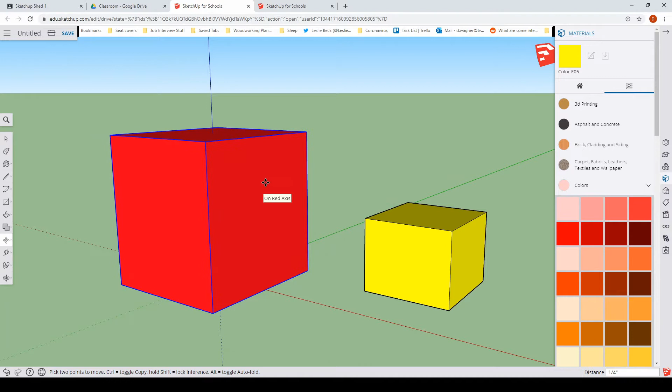You can also move it a specific distance, and we're going to be doing quite a bit of that. So if I make sure that I am on the red axis or the green axis, I let go of my mouse and I don't touch it anymore. And then I enter the distance. You'll see the distance in the bottom right-hand corner. So right now it says that I'm moving at 5 foot 2 1/8 inches. If I enter 120 inches in there, it will move 10 feet, just like that.

That's going to be important, and you have to keep that in mind. I'm just going to undo that and move it back.

You can also grab your components by the snap features to different parts of them. So if I want to move, say, this yellow component, and I get up to that shape and it says corner of component number 2, I can grab it by that corner, and then I can carefully place that corner on the corner of my other component. I could place the corner on the midpoint of that edge in my component, or I could place the corner right there. I can also grab it by the midpoint in the component and sort of put it right there if I wanted it to look like that for some reason.

So for right now, I'm going to grab this component and move it into position where I sort of want it to make my points here in the lesson. We'll have the move tool, and I will grab it by that corner and put it to that corner.

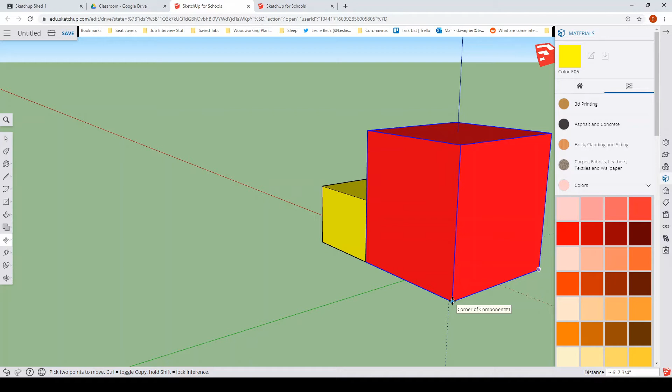Duplicating a component, so copying a component - a lot of different design software has a specific copy command, so that you would hit copy and then you would copy your piece. In SketchUp, you actually do the same thing as the move command, so you click on your box and you start moving it, and then you hit the control key, and that will leave the original one that you went to move. So now I can move this right to the edge of that component, and I would have a shape that looks something like that.

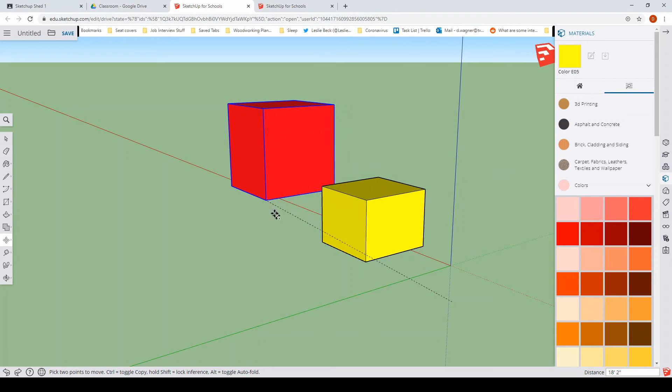One thing, I will undo that. One other thing that you can know about moving is: click on the component, click control, and you move it to that component. Now if you look at the bottom, after I've moved it, if I just type in X4 and hit enter, it will copy it 4 times so that I end up with a total of 5 of them. That's how you make multiple copies in SketchUp. It will copy them, and it will move each one the same distance that you moved the original one, if that makes sense.

Another thing that we want to keep in mind here is editing components. So if I want to say, I want to keep this - let me undo that - and I will just move this, copy it.

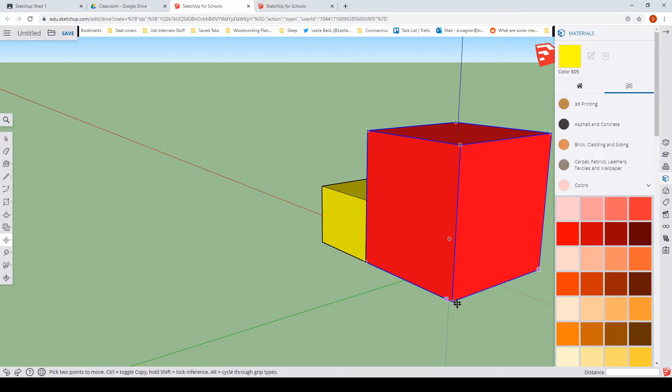So I have a little shape here that's simpler. If I want to change a component, if I've made a mistake or want to modify a component in one place, I can click this and hit edit component, and then that component opens up and I can modify it.

I can push-pull to one side of that, but watch what happens now - everywhere in the drawing, that component will change. That has its advantages, but if I wanted to keep all three parts touching and I modify a component, I'd just have to rearrange those parts after.

I'll hit escape so it doesn't do that. When you want to close the component, you can't actually click on the component and close it - that's kind of a strange thing. You have to click off the component and then hit close component, and now that component is closed and you cannot edit it anymore.

If I decide I only want to change one component - if I drew something and decide I need a different version of that component, or want it to look different than the others in one place in a drawing - what I have to do is click this component and select Make Unique.

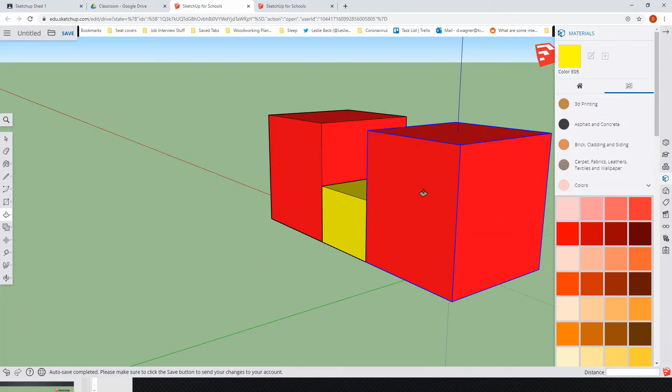Now that component is its own component, not the same as this other one anymore. If I edit it, I can now push-pull it and the other one will not be affected. You can see the other one is not changing size and shape, and this one is.

I have to explain the reasoning behind the dimensions we're doing here. We're trying to build this model shed in SketchUp as though we were building it in the real world, so you'd actually know how it's put together. We have to follow things to scale to keep the realistic nature of this. We've got three pieces here I want to show you.

This red piece represents the component you built last day. This 96-inch yellow piece represents the component you'll be building today. This 96-inch long blue piece is a sheet of plywood. I've just changed the colors so it's easy to follow and see what's going on here.

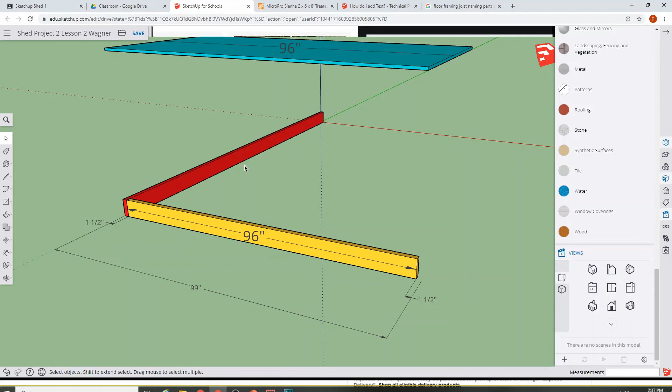So we've already made this red one. We'll be making this yellow one today, and we'll be duplicating those to complete the floor frame. There's a little something you might have a question about - when you buy an 8-foot piece, we're going to end up cutting 3 inches off of them.

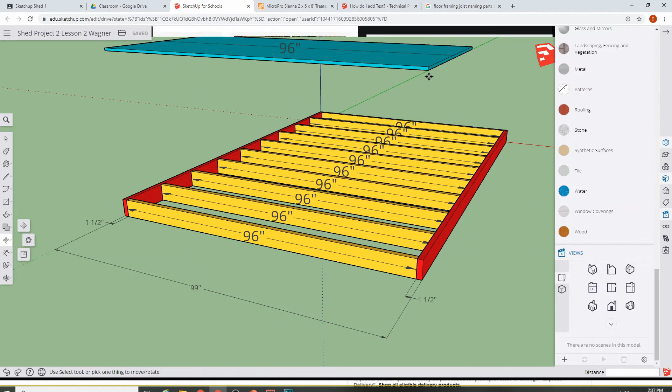This is the reason for that: if you were building this shed in the real world, you'd have to put a plywood floor on it, and your plywood would come in a length of 4 feet by 8 feet, so it would also be 96 inches long. Now, if I take that piece of plywood and move it down onto my shed floor and set it in place, you can see the plywood is 96 inches long.

This joist is 96 inches long, plus you actually have 1.5 inches on this piece here and this piece here. So the frame is wider than the plywood is long, which means these edges of the plywood will have no support, and you won't be able to nail that plywood down to the joist. If I move this plywood back to the right spot and shift it, you can see there's a 1.5 inch gap right here.

So we are going to have to cut these 96-inch pieces down by 3 inches. In the real world, you'd take a saw and cut 3 inches off of every one of those pieces. Since it's SketchUp, we'll have an easier life and just make 93-inch pieces and duplicate them, getting those 96-inch pieces cut down to 93 inches. That will make the overall width of our frame 96 inches, which will match the length of our plywood, and all the edges of the plywood will be supported, with wood underneath all the edges to drive nails and screws into.

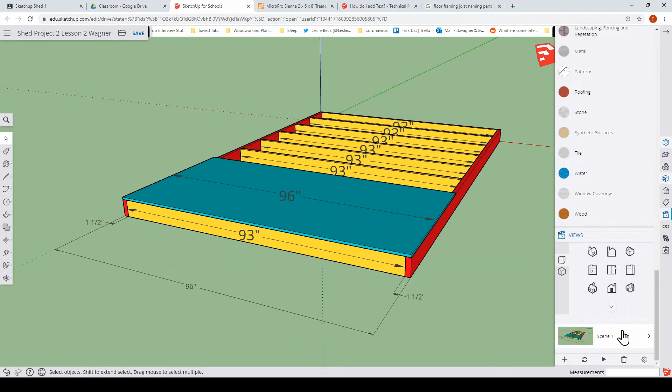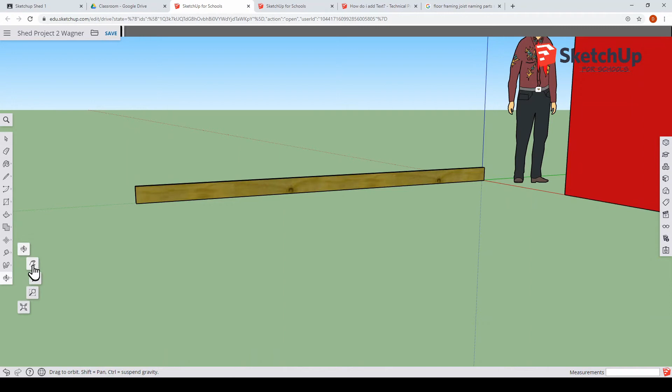So moving into the shed building part of the day, we're going to add that cross piece, that other joist, and get this focused in a little bit where we need it. Put it in the center of the screen, orbit it so we can see straight onto it, and zoom in a little bit. Once again it's kind of off the screen, so we'll drag it into the middle again. We're going to add a rectangle right here in order to build our joist.

So you'd want to make sure that you're snapping actually. Oh, wrong tool.

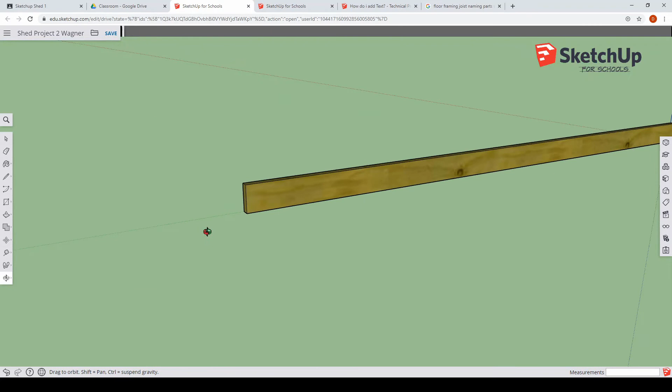Make sure that you're snapping exactly on this corner, because you want that rectangle to be on that surface. Make sure that your outline is in red, and then you can enter in the dimensions. Okay, so I'm having a little trouble here, but now it's in red.

So if it's in red, I'm good, and I enter 5.5 comma 1.5, and I hit enter, and there my rectangle came out facing the wrong way, which I had checked out earlier and it wasn't doing that. Remember I entered 5.5 comma 1.5. Well, I'm going to undo that, and I'm going to redo my rectangle.

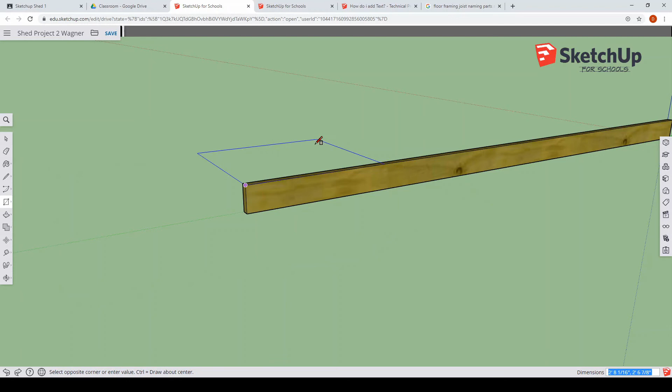Okay, I've run into another interesting thing that's actually new to SketchUp as far as I know, but now my rectangle is drawing outwards from the middle of the rectangle. So I'm building a rectangle around that point, and I don't want that. If I hit Control, it goes back to being a normal, ordinary rectangle.

So I put my rectangle on there, make sure that it's red. The first time I entered 5.5 comma 1.5, this time I'm going to enter 1.5 comma 5.5. Just reverse the two numbers and it'll be fine.

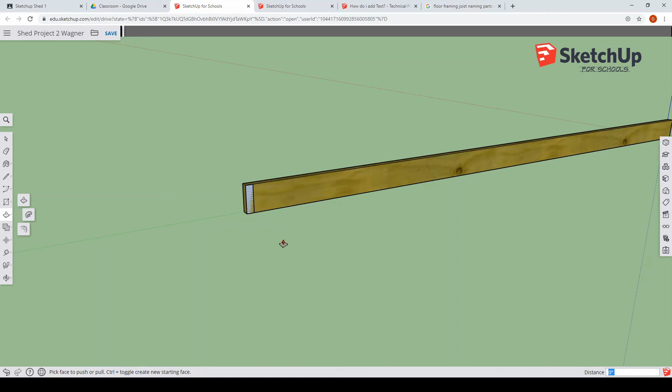So you're going to take this rectangle and pull it out to 93 inches. Is it coming? Yes. Do you want to overwrite it with your current changes? Yes.

93, enter. So now I've made my other component that I'm going to make today, but I haven't made it a component yet. I get my select tool, boom, boom, boom, 1, 2, 3, fast, make it a component.

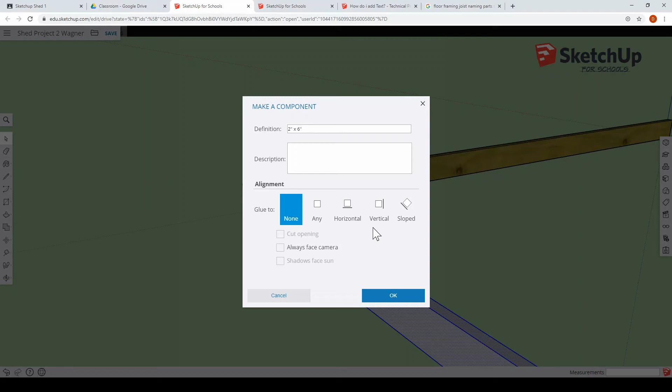If I want to name it, I would name this 2 by 2 inch by 6 inch by 8 foot, and that's done.

So there we go, and we're going to have to paint bucket it to be that green color of wood that we like so much. Boom, done making that component.

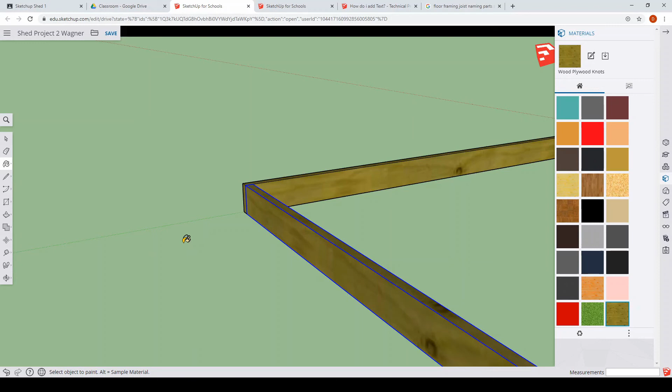So now we will have to move that other joist so that we have two joists, another joist going this way. So this is going to be your first experience at actually moving something.

Remember what I said about being able to grab things from a corner. First of all, make sure you've got the right part selected, because moving gets a little frustrating if you don't have the right part selected.

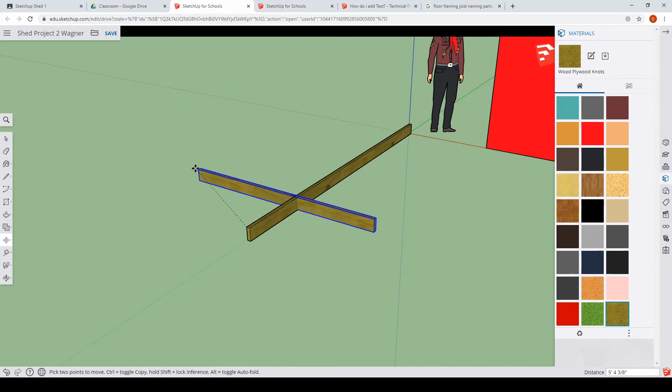So you can select the move tool and hover over a part and it will select it. But if you have the wrong piece selected and you hover over a part, you get the right point that you want, but now I'm moving the wrong piece. So I just hit escape and that goes back, and I would make sure that I have my correct part selected.

Get my move tool, and I want to snap onto that corner. So I'm going to hit that. Now I've got my control key to make sure that I'm duplicating it, and then I can move this part right down to there, and I have two pieces of my floor frame done.

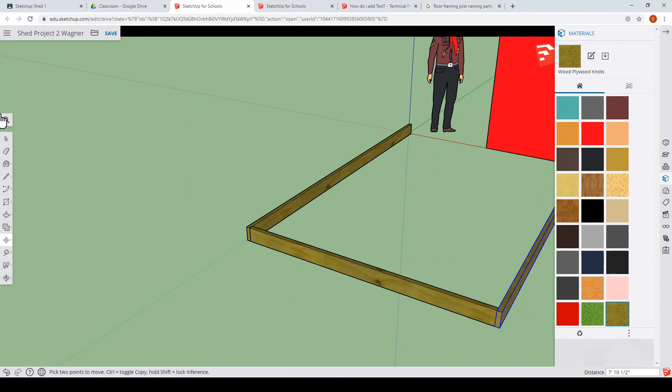This would probably be a good time, if you haven't already, to just get rid of that red shape there. We don't need that red shape anymore. It was just kind of a landmark to get us situated.

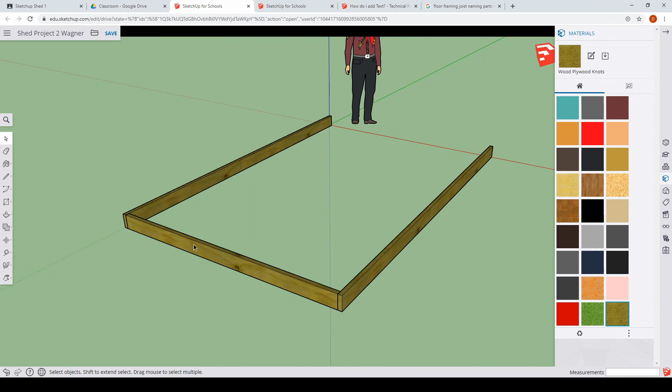And we can center this a little bit. And now what we'll do, we will move this joist here, and we're going to make lots of duplicates.

So we're going to do a move, and you can click on it anywhere and move it, as long as you make sure that you're moving it on the green axis, right? So you're going to hit Control so that you're duplicating it.

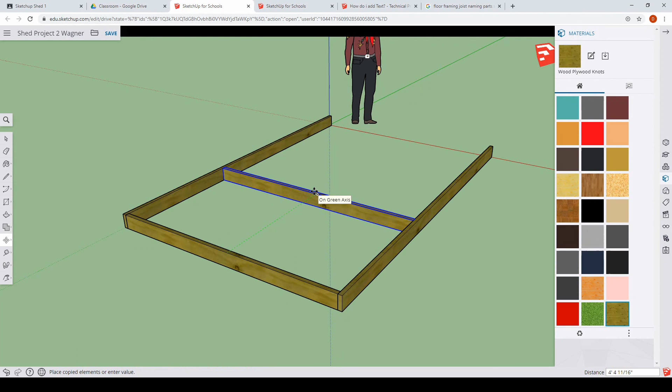So now I'm making more than one. I'm going to hit 16 inches for the distance, which I just typed in the number 16 and hit enter, and then I'm going to enter X9 and push enter, and that's going to give me 9 of them.

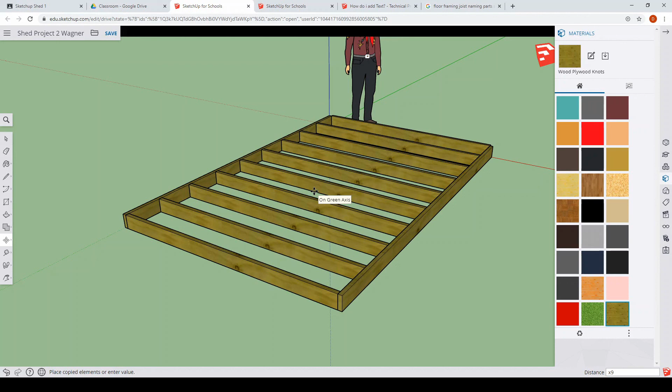So that is all the pieces that we need. But the way the situation works out, if you look back at this back corner here and zoom in a little bit, you've got one joist that is off like that. That's how it works out. There's probably a long explanation for it, but you guys have heard lots of long explanations today already.

So I'm going to get that corner right there, and I'm just going to move it back into the position that it needs to be in, which is snapped in on that corner, and boom, that's done. Make sure that you save this work. I'm not sure there's anything else I had to touch on.

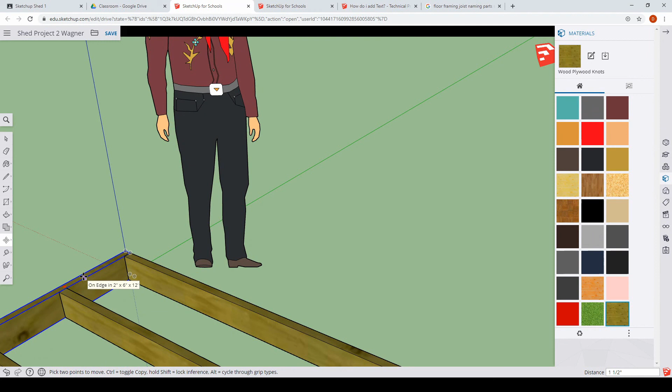Tomorrow we will have to shift some of these joists over just to match the edges of the plywood, or next day, I guess, but this is it for today. And if you look at what we've done here, we really do have a fine looking shed floor frame. So I'll see you next day, and I hope everybody has a good one.